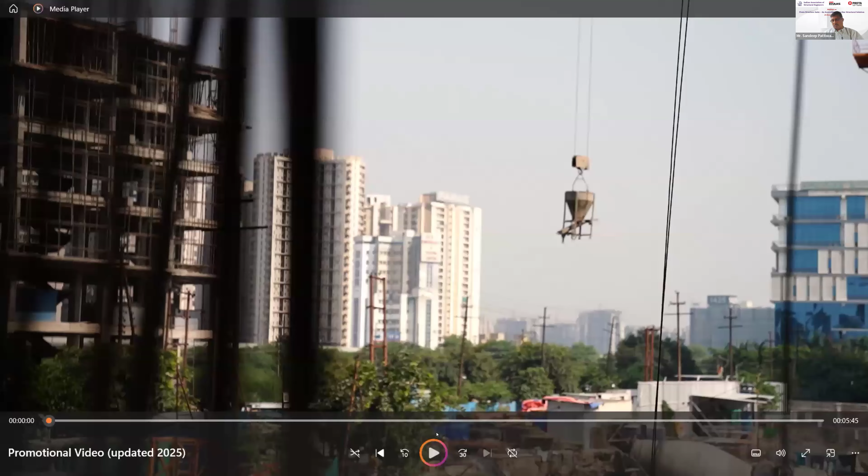The Indian Association of Structural Engineers, also known as IAStructE, was conceptualized and constituted in the year 2002 by a group of senior professional structural engineers from all over the country. IAStructE is registered under the Societies Registration Act 21 of 1860.

IAStructE is a national apex body of structural engineers in India with a mission to promote the structural engineering profession and cater to the professional needs of the structural engineering fraternity. In the short span of two decades, the association has attained an eminent position in the professional field, and its membership is valued very highly in the profession.

Since inception, IAStructE has been led by eminent structural engineers like late Shri Mahendra Raj, late Shri Kumar Ghosh, late Shri Subhash Chand Mehrotra, Professor Mahesh Tandon, Shri Manoj Mittal, Professor R. Pradeep Kumar, and Shri Alok Bhowmick as its president.

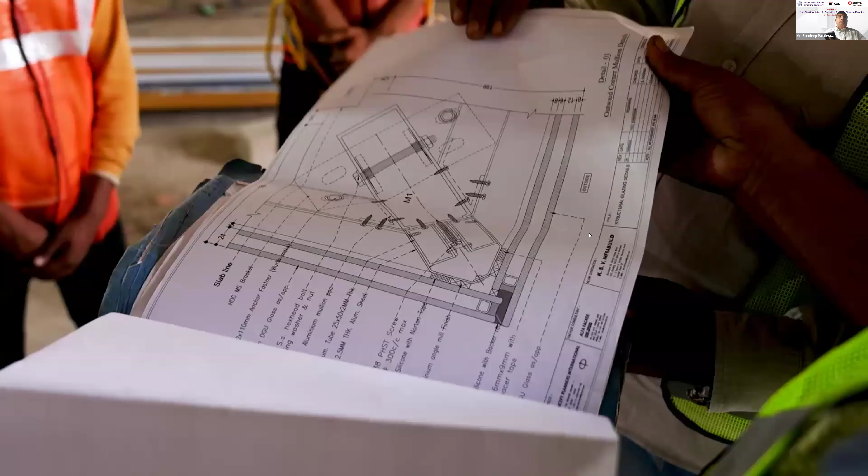IAStructE is a permanent member of the Engineering Council of India and interacts with the government on professional and policy matters related to civil and structural engineers. To expand its reach, IAStructE has collaborations with various international professional like-minded associations and institutions like IStructE UK and FIB, for strengthening global connections and professional exchange.

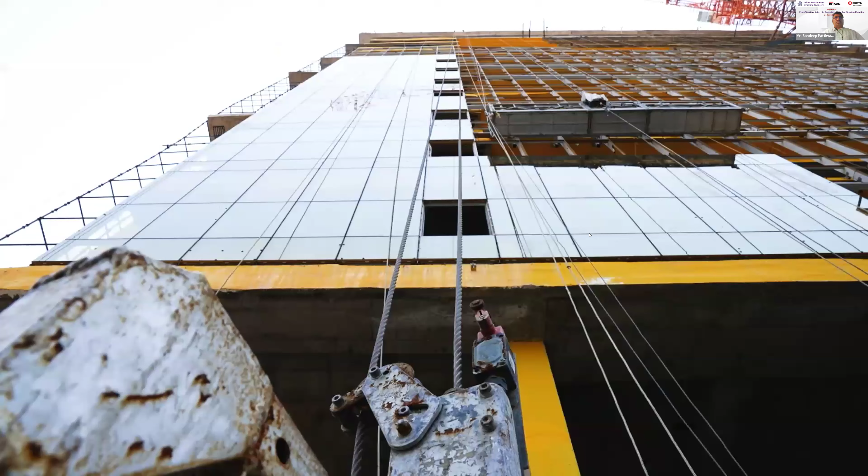IAStructE's prime objective is supporting and protecting the profession of structural engineering by upholding professional standards and acting as a mouthpiece for structural engineers in India. IAStructE endeavors to ensure that its members develop the necessary skills in structural engineering and work to the highest standards by maintaining a commitment to professional ethics and standards.

IAStructE is actively engaged in organizing several continuing professional development (CPD) courses for structural engineers to help them update their knowledge and advance their career paths. It also conducts refresher courses for young and practicing engineers, student-oriented programs, seminars, workshops, conferences, technical lectures, and discussions related to the latest technological advancements. Case studies are also organized regularly for members to enable them to continuously update their knowledge and skill set by interacting with the best minds from the industry.

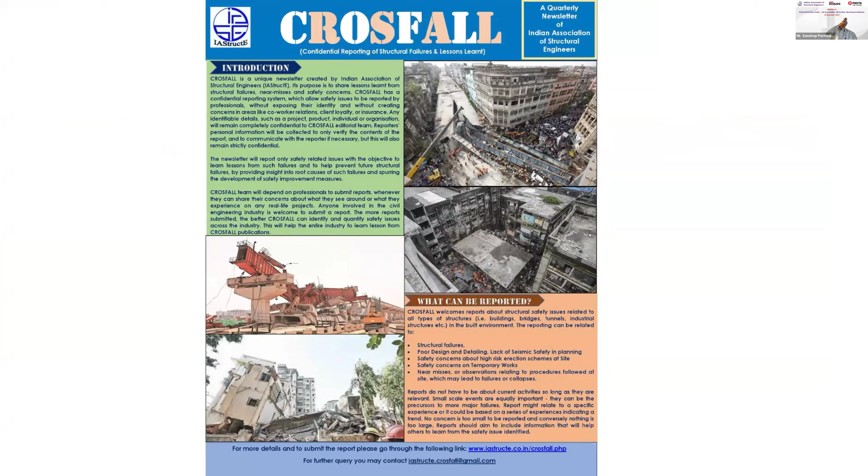IAStructE's activities are widely appreciated and known for quality technical content. IAStructE is also actively engaged in publishing its quarterly journal Structural Engineering Digest (SED), code commentaries, professional guidelines, a monthly newsletter, and CROSFALL, a unique quarterly newsletter that confidentially reports structural failures and the lessons learned from them. IAStructE's publications are becoming popular with time.

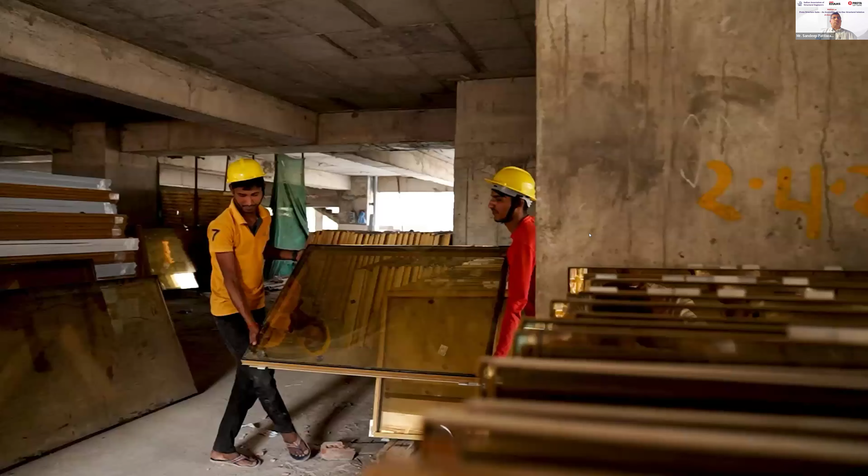IAStructE has representation in various technical committees of BIS and IRC as well. Its members are actively contributing to National Code Formulations.

In the year 2020, IAStructE started the National Awards competition to stimulate interest in the structural engineering field and to promote innovative thinking and creativity. The awards are presented to the winners in recognition of their outstanding contribution to structural engineering, in categories which include Outstanding Structure, Outstanding Structural Engineer, Outstanding Woman Structural Engineer, Promising Young Structural Engineer, and Best Master's Thesis in Structural Engineering.

Reaffirming its commitment to professional excellence, IAStructE launched the accreditation program in 2023. This flagship initiative empowers practicing engineers to evaluate their competencies, identify growth opportunities, and strengthen the foundation for sustained professional success.

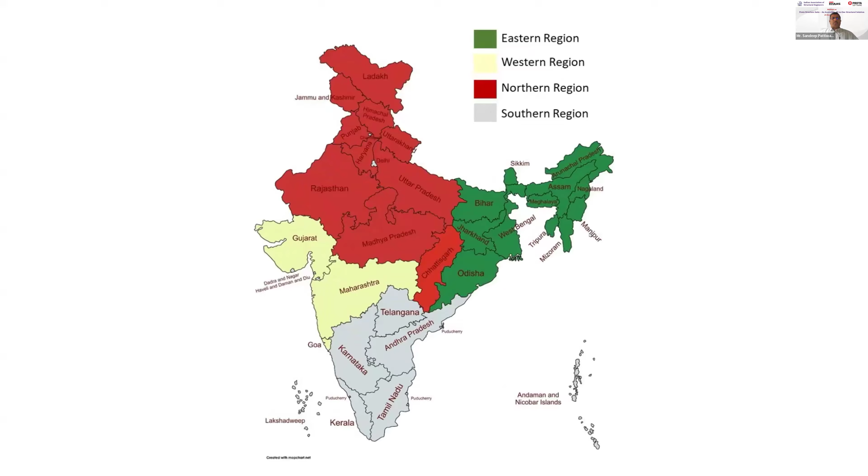IAStructE is currently operating from four regional centers, namely Eastern, Western, Northern, and Southern, having its headquarters in Delhi, to inculcate the professional culture and provide hand-holding to the budding engineers.

Joining IAStructE offers exclusive resources, mentorship, and networking with industry leaders. Members enjoy discounted registration for workshops, seminars, and events, along with discounted membership of FIB, opportunities for certification, career guidance, leadership roles, and enhanced professional recognition.

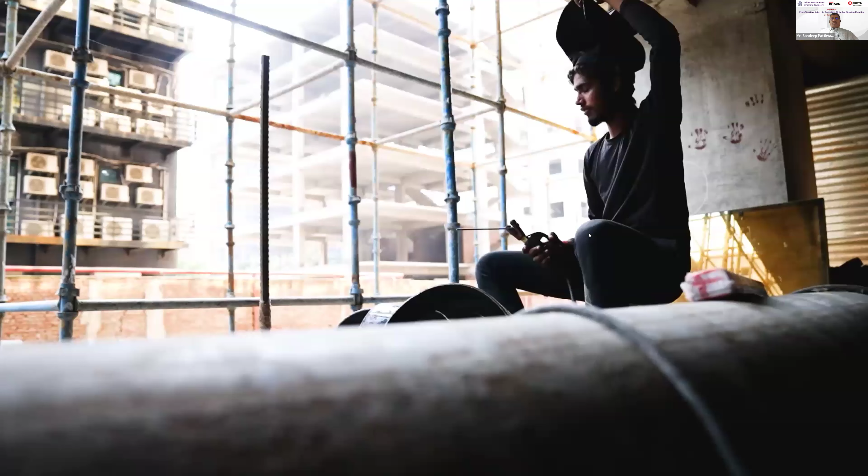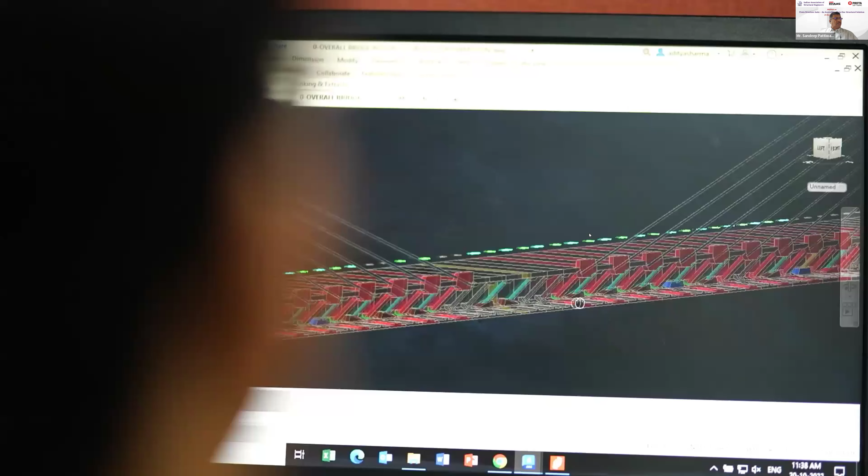IAStructE has its student chapters in several leading engineering institutions as well. Membership of IAStructE is open to all civil and structural engineers engaged in the structural engineering profession. Members are elected based on their qualifications and experience in different grades as per eligibility requirements prescribed in the bylaws. Each application is carefully scrutinized before electing the members.

More information about IAStructE is available on its website, www.iastructe.co.in.

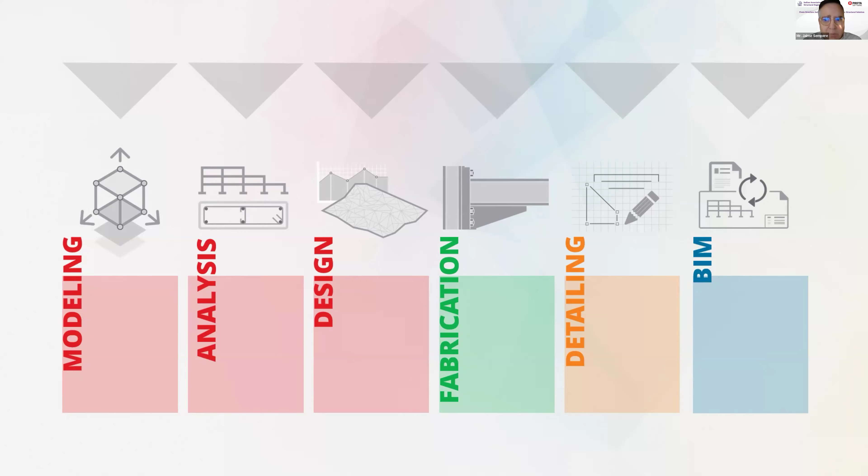You will notice that ProtaStructure Suite is composed of just one software that within it has 4 different softwares. We differentiate ourselves by integrating modeling, analysis, design, detailing, fabrication, and BIM process seamlessly, allowing you to integrate the whole process in a single solution. This allows our users to rapidly deliver projects by using a single software, hence the reason we refer to ProtaStructure as an all-in-one solution.

ProtaStructure Suite consists of 4 different modules, and we provide them in a single package if needed. We have ProtaStructure, which is the core system for modeling, analysis, and design of your structures. It is complemented with other tools like ProtaDetails, a complete CAD system for automated detailing and drawings, focusing on concrete detailing. It includes a unique design library of calculations for design of things such as retaining walls and piles. ProtaSteel complements steel design by automating all the steelwork connections design.

It provides comprehensive steel detailing and automatic connection design of our structures. Important note, we provide drawings and calculation reports within ProtaSteel as well. And finally, ProtaBIM allows you to connect with other tools and systems that you may be using, allowing you to collaborate better with team members. ProtaBIM allows the team to communicate with other BIM platforms and solutions like Allplan through IFC, or Archicad through SAF, and even share analytical data with SAP or ETABS.

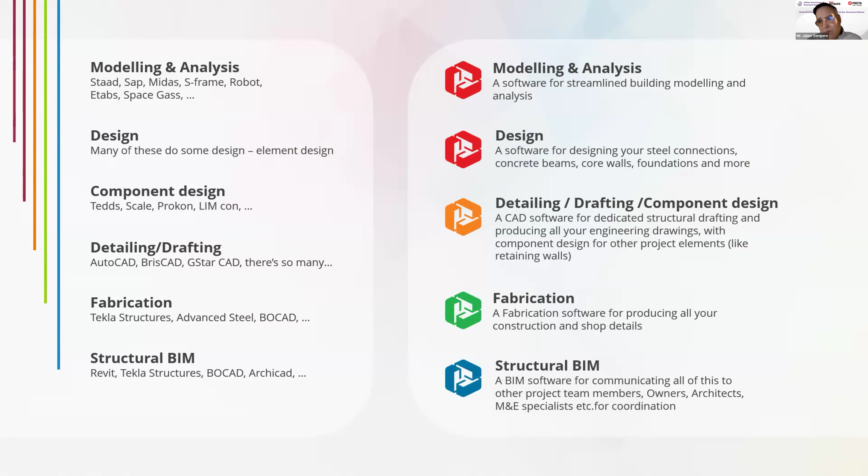So instead of having to go through many different solutions—one for modeling, another for design, another for components, detailing, fabrication, and so forth—we're able to bring all of these solutions under one umbrella within ProtaStructure Suite. That's why we refer to this as an all-in-one software.

ProtaStructure Suite is developed with BIM in mind. It was always developed with BIM in mind. So here's a slide where you can see better the entire BIM flow of our software solution. Remember that all these solutions are offered in a single economical suite called ProtaStructure Enterprise.

You can use Prota Details, the revolutionary structural drawing detailing software, to automatically create and organize all your RC drawings. Then you could take the model design of ProtaStructure directly into ProtaSteel and save hours with automated design of a comprehensive range of bolted and welded connections of your choice.

You can directly link your model to BIM platforms and software solutions like Autodesk, Revit, Allplan, and many others, focused on formats including IFC, 2D, 3D, DXF, and SAF. You can transfer and compare your analytical model with other general purpose analysis software such as ETABS or SAP 2000. And you can also create and share highly visual calculation reports featuring Microsoft Office or PDF export as well.

Product excellence is necessary in our sector, and it is also the key to our success. ProtaStructure is being used by thousands of large enterprises all around the world. You may have heard of some of them, worth mentioning, like AECOM, Sunway, Arup, WSP, Jacobs, L&T Construction as well. These organizations have been using the product to deliver their engineering projects for many years.

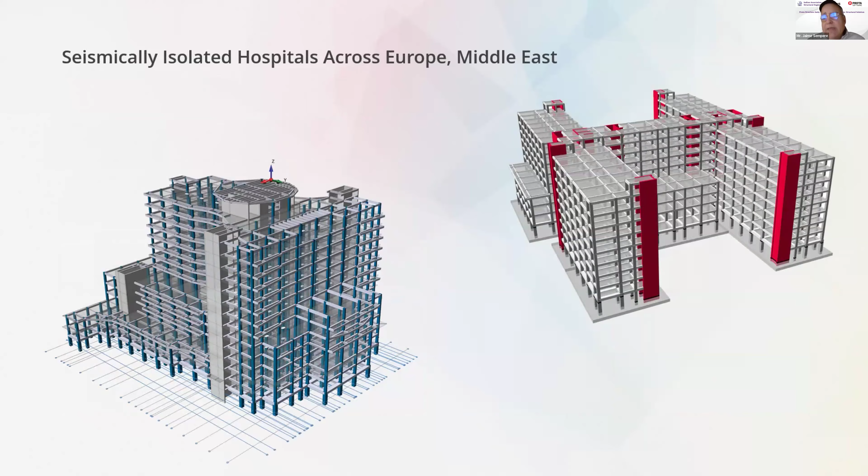Let's also keep in mind that several hospitals were also designed with ProtaSuite. One worthy note is that these hospitals are also seismically isolated buildings. With ProtaStructure Suite's unique capabilities, you can insert seismic isolators into your buildings too.

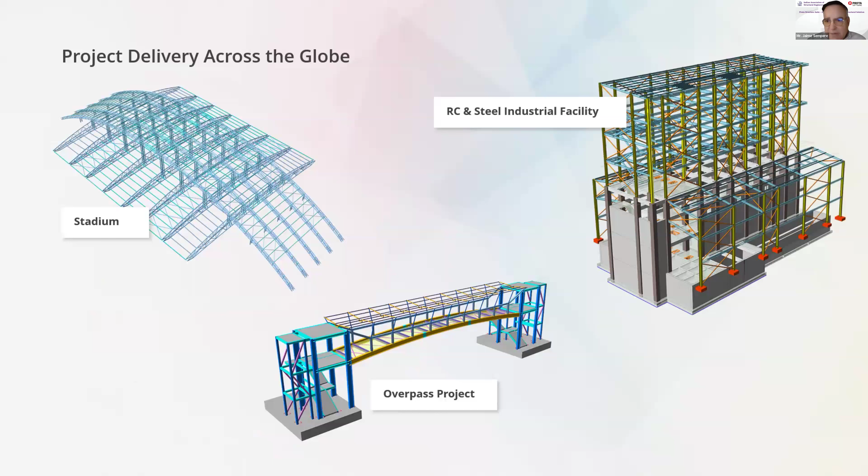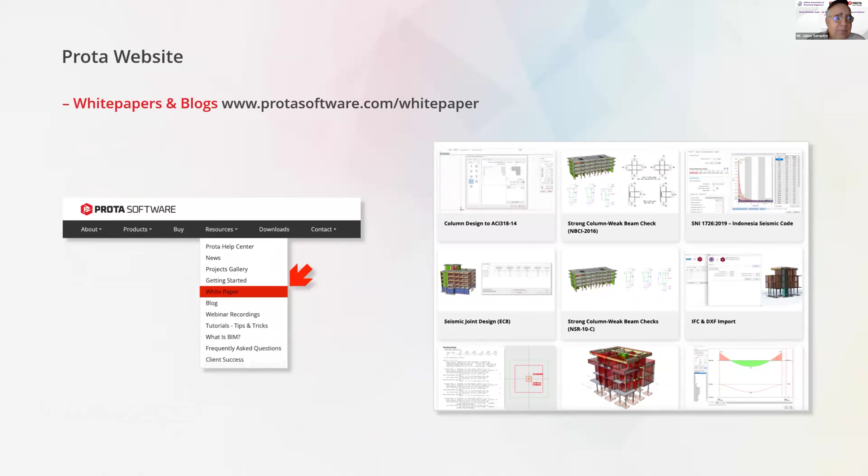In addition, we also pride ourselves in having an excellent help center and excellent technical support. It's not just about offering software, but it's also about having all of that support, data, and information ready to handle the customer and assist them in all their doubts, whether it's through our website, through blogs that we have prepared, or also our YouTube channel, okay?

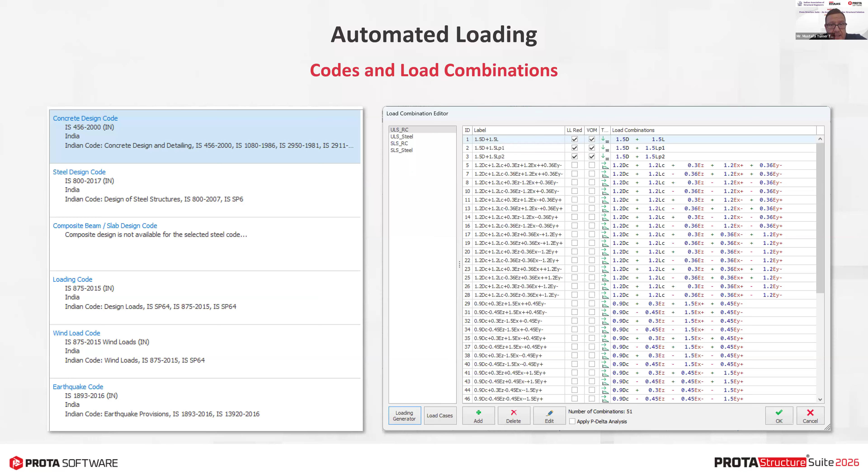In ProtaStructure, load combinations are generated automatically using an interactive wizard. You can choose options for vertical and lateral load cases, such as pattern loading, construction stage, P-delta effects, response spectrum analysis or equivalent static analysis, or even vertical earthquake analysis. All the combinations and load cases will be automatically created by ProtaStructure by honoring the selected design and seismic codes. We also create the ultimate limit state and serviceability limit state combinations for reinforced concrete and steel as well.

One item to note here is the 2025 version of IS 1893. We know that it has been published in India and you have a transition period of 3 months. So this is also a work in progress and we are hoping to release it to you soon.

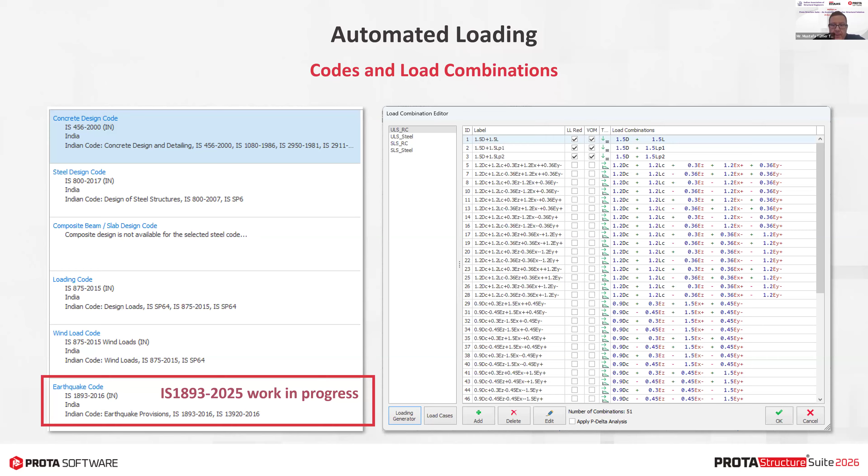Wind loads are calculated in ProtaStructure according to IS 875, the Indian wind loading code. When you launch the wind load generator and specify the necessary parameters, such as basic wind speed, minimum wind pressure, directionality factor, structure type, and terrain category, all the wind forces acting on the story levels will be automatically calculated. Besides, you can also import wind loads from an Excel spreadsheet.

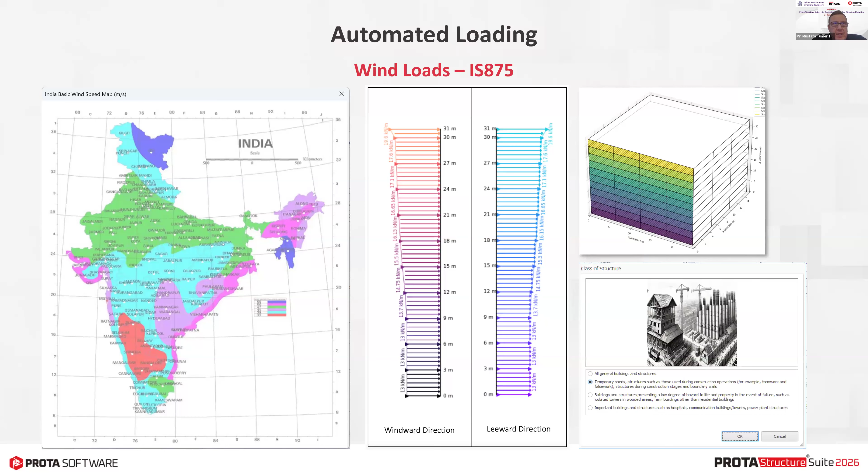So let's say you have a wind tunnel analysis and you get the results from that detailed wind tunnel analysis. If you have those results in an Excel format, you can import it into ProtaStructure and apply it to the story levels as well. But wind loads is an important topic in Indian standards, and we had a lot of requests about it, especially about the dynamic wind loads.

That's part 3 in IS 875. We have implemented that as part of the release in ProtaStructure 2026. We are now supporting the empirical natural period calculation. We can calculate the dynamic response factor now, including also the vortex shedding frequency and the resonance risk check. These are all part of the wind load report in ProtaStructure. However, aeroelastic instabilities such as flutter or galloping effect or component-specific oscillations are not in this scope.

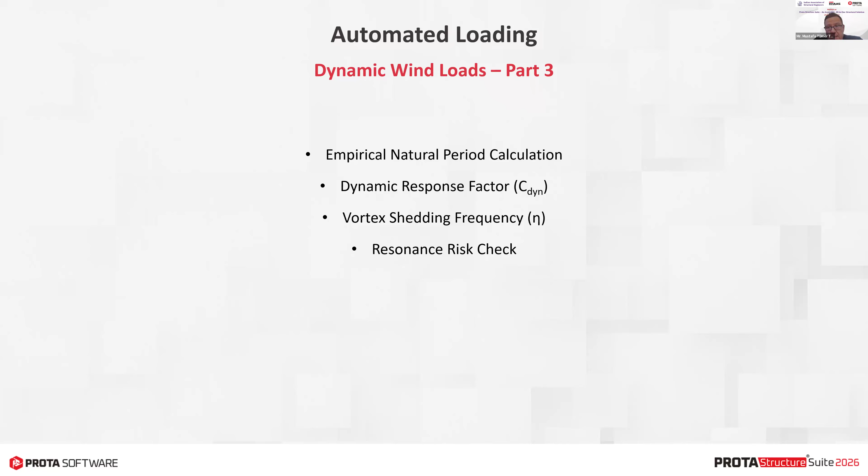We must emphasize that. ProtaStructure has a very comprehensive user interface for calculating the acceleration spectra using the parameters outlined in IS 1893. You can select a town in India and the related seismic zone and seismic zone factors will be fetched automatically. We provide you with helper tables taken from the code with relevant references, so you are not lost in the code. You can select different structural systems in each orthogonal direction to make use of different behavior factors and, of course, different design spectra.

Also, IS 1893 requires a different ascending portion for the spectral curve. These are all detailed analysis settings.

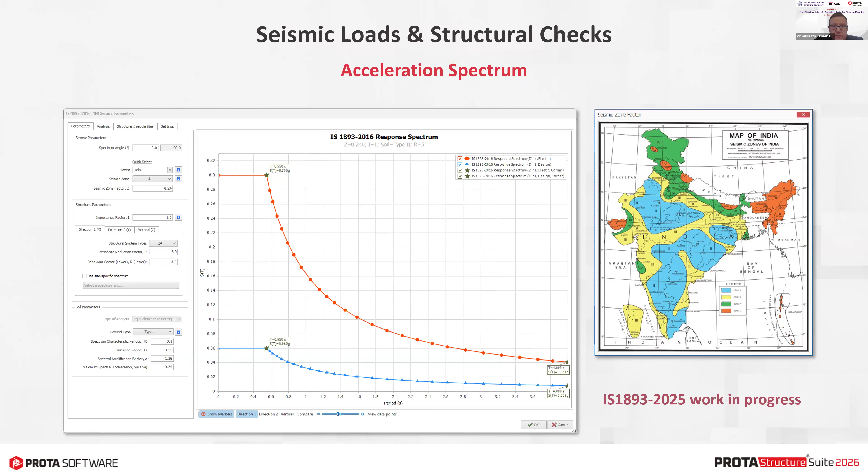But after that, seismic analysis is not complete unless you perform irregularity checks. All the analysis is done according to this elastic and design spectrum calculated in the previous step, but the post-analysis report, for example, includes all the important checks related to IS 1893 with code references. For example, a drift-based soft story check is done, vertical mass distribution is checked, torsional irregularity is checked, and analysis is automatically repeated with additional eccentricities if a certain penalty is required. Also, applicability of the equivalent static method is checked.

If you have a building with a basement, basement validation is done, comparing the upper structure period to the whole structure. Inter-story drifts are checked, and the prominence of second-order effects is checked. If you have a basement, a two-stage analysis is performed for these kinds of buildings, which allows you to use different mass sources for the basement and the upper superstructure. Additionally, response spectrum analysis and equivalent static comparison is done, and cumulative modal mass participation is checked and reported in this report.

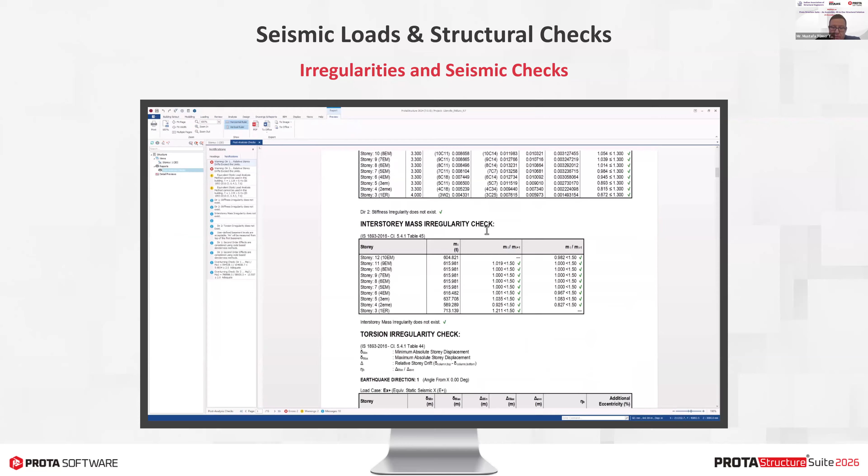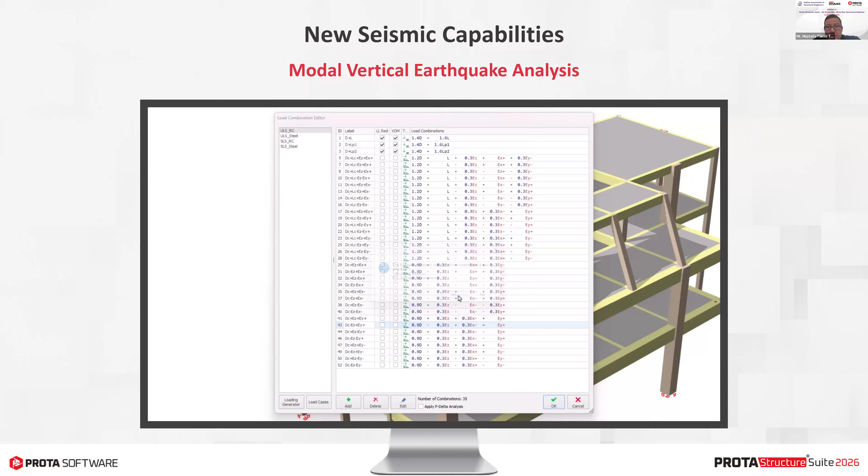For buildings with transfer columns, large slab openings or beam spans, large cantilevers or slanting columns, the approximate static vertical earthquake calculation may not be sufficient. Besides, the seismic codes require the use of modal vertical earthquake calculations in these kind of extreme scenarios. For example, Eurocode only allows the use of modal vertical earthquake analysis.

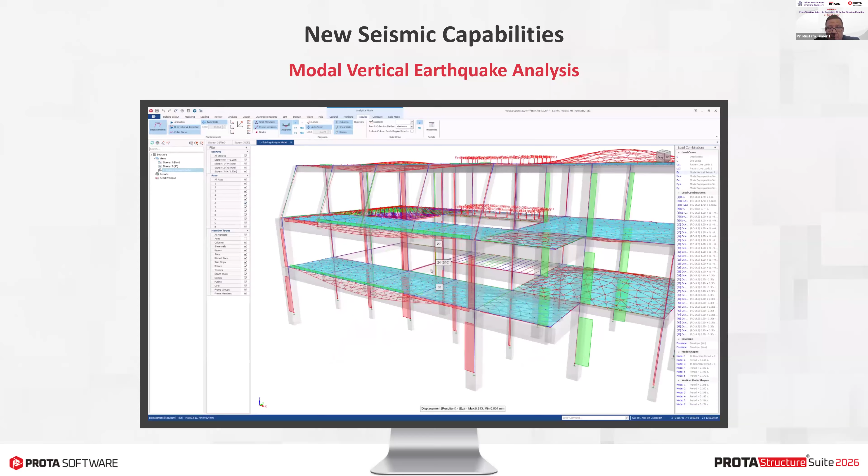For this purpose, we first introduced the vertical acceleration spectrum in ProtaStructure, accessible in the seismic parameters window, and it's also reported in the pre-analysis report. Secondly, we automatically calculate the vertical mass distribution, or vertical mass matrix. Slabs should be meshed to accurately consider the mass distribution. We then automatically calculate the vertical vibration modes, which is very different than the lateral vibration modes, and the number of modes can be customized by the user.

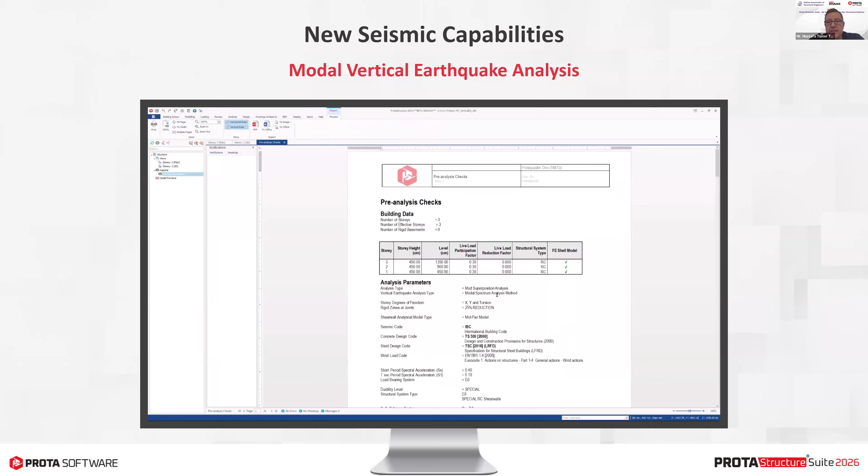The heart of this analysis is a mode superposition analysis in the vertical direction, not lateral. The results are obtained in absolute terms with dominant mode sign.

After the lateral and vertical earthquake analysis, ProtaStructure continues with member design. For beams, we support ductile design and detailing. We automatically detect the confinement zones, perform capacity shear design and plastic design for the members, and of course the entire bending design is done under an envelope including the seismic forces.

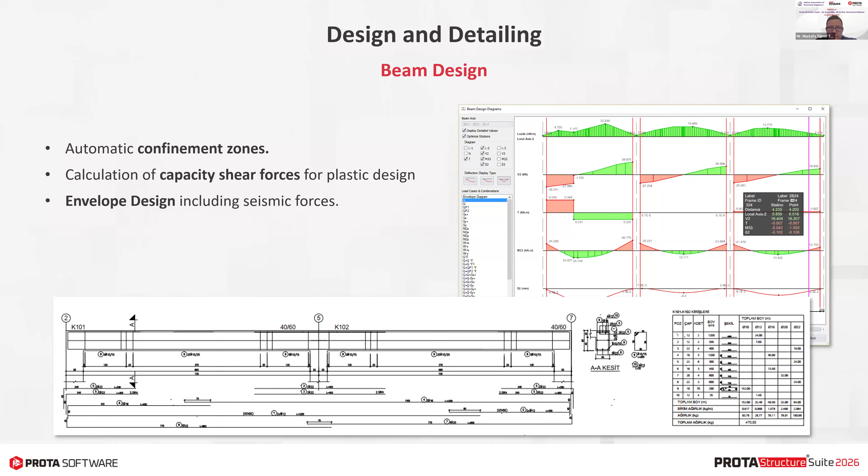Complementing the reinforced concrete beam design is a detailed step-by-step beam design report. Providing transparent design documentation is our number one priority, and we've invested a lot of time to fulfill this. The RC design reports in ProtaStructure now include more details, step-by-step calculations, formulations, and code references.

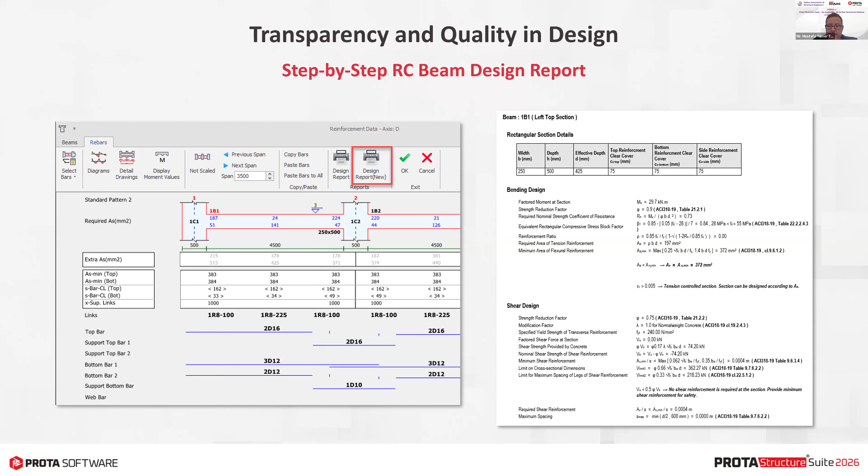When it comes to columns and shear walls, ProtaStructure is also capable of doing ductile design and non-ductile design for non-seismic areas. We support true biaxial bending for columns, and we do capacity design for seismic scenarios. The column section is automatically confined with single link, double link, diamond links, or tie bars - all available in the software.

We automatically detect the minimum reinforcement ratios and constructive rules. Confinement zone lengths are automatically determined, and links are designed in span and support regions. Links inside the column sections are automatically laid out, considering the confinement requirements.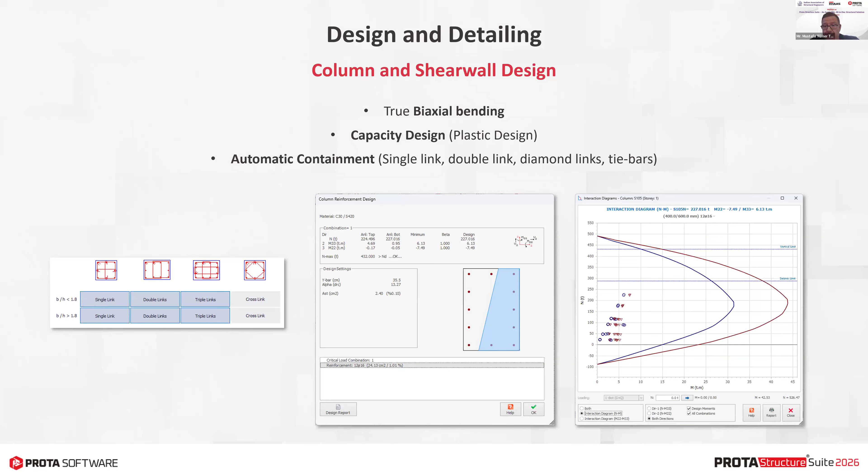When it comes to walls, a crucial part of the shear wall design is the boundary elements or end zones - a very challenging task in shear walls, and different codes suggest different methodologies and approaches. In ProtaStructure, you can automatically lay out end zones using a percentage of related wall length or by specifying a distance.

End zones of core walls with known shapes such as E, C, L, T, or H can be laid out automatically using the polyline column editor. For random shapes, full automation may not always be possible, but we've developed tools to make it as easy as possible to insert the end zone rebars. We have an interactive polyline wall editor where you can specify the end zones yourself and put the rebars in the web regions and end zone regions.

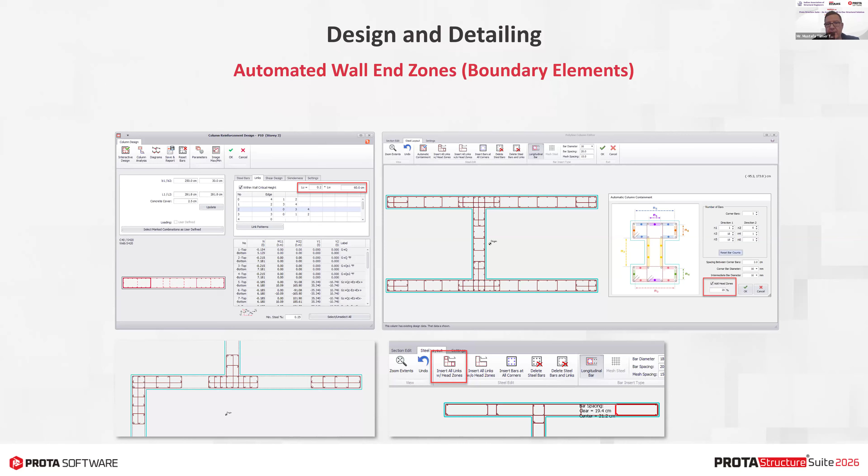For effective column detailing, ProtaStructure offers comprehensive options to cover a wide range of constructability and code scenarios. Among these are optional lap splices at the column mid-height - there's a setting that allows you to lap splice the longitudinal bars in the middle of the column or at story levels. Also, hook anchorage options are possible, and the links in the joints can be customized. We have very comprehensive options for column detailing.

We also support different shear wall horizontal web bar layout options for ductile detailing. When we observe the damage in earthquake regions after severe earthquakes, most of the damage in shear walls is either shear failures, shear cracks, or damages in the end zones.

Under extreme loads, the end zones of the shear walls are in compression, and the longitudinal bars end up breaking the concrete and popping out of the section in the end zones. To prevent this, we have a couple of options to anchor the horizontal web bars into the end zones, which you can see on the screen.

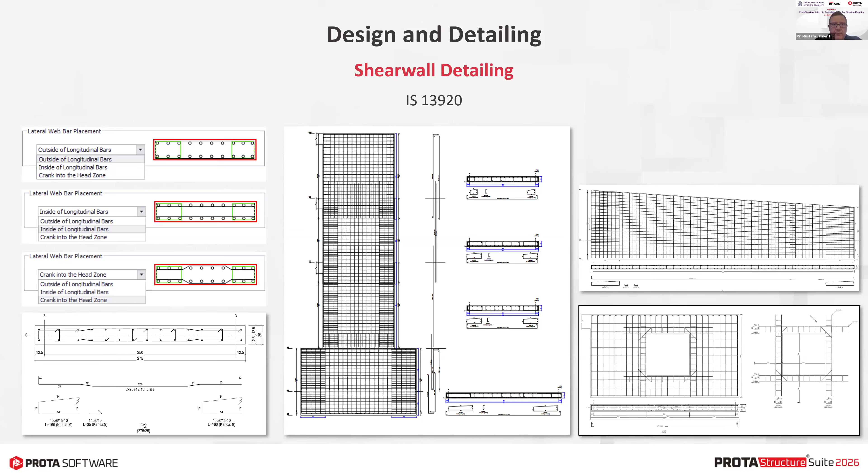Of course, we support all this design and detailing with a step-by-step reinforced concrete design report. One of the most important checks to ensure ductile behavior is the strong column and joint shear checks, done in accordance with IS 13920.

So what we do is, after you design the structure, you must put the reinforcements in the columns and beams. After that, ProtaStructure checks the capacities of the beams and columns to make sure that the columns are stronger than the beams and the joints do not fail under shear, to prevent a brittle failure.

So these are all done with detailed reports in accordance with IS 13920. We have a visual interrogation tool that shows the failure status or success status with color codes. By the way, this is one of the most challenging parts of a design, especially if you are designing a frame structure without using any shear walls.

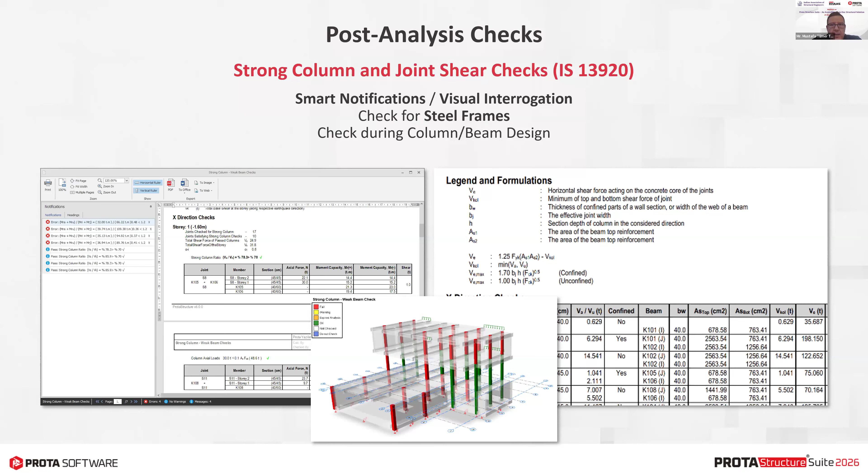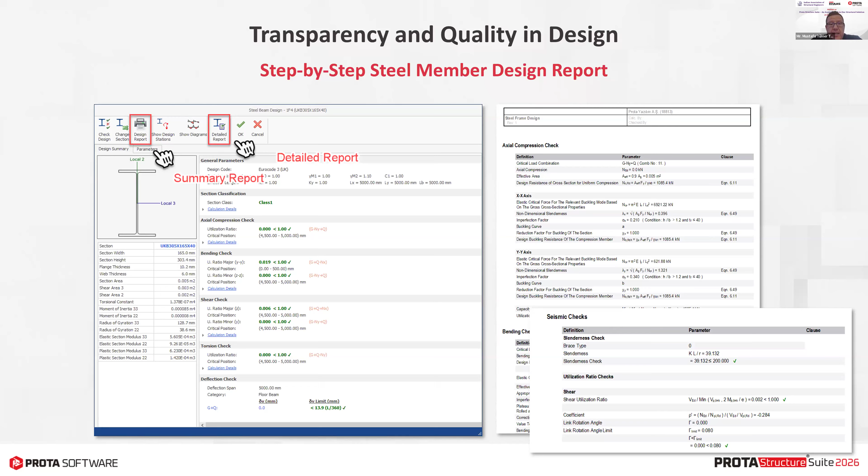This may be one of the toughest checks to fulfill. Lastly, we do have a steel design functionality. Of course, we support IS 800 for steel design, and we have detailed step-by-step reports for the steel design as well.

An important aspect of ProtaStructure is the performance-based design, assessment, and retrofit. So why is it important for engineers in India? Because we have received requests about IS 16700, which is for high-rise structures.

Actually, we have a similar concept in Turkey as well, where the Turkish seismic code has a dedicated chapter for high-rise structures in highly seismic areas. So the capacity design principles are not usually applicable or sufficient for high rises, because you have to verify or check additional performance criteria under different earthquake levels.

For example, for an earthquake with a return period of 475 years, it's our design earthquake. The capacity design principles may be applicable for a regular structure, and when we apply those principles, usually we say that this design is successful.

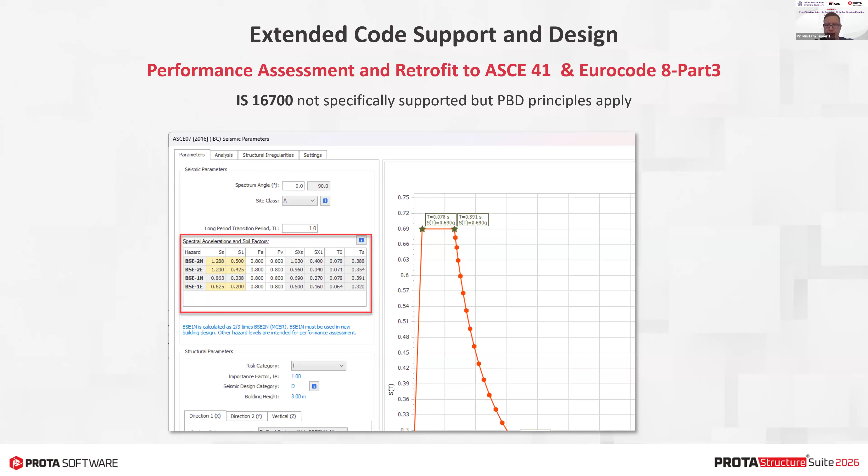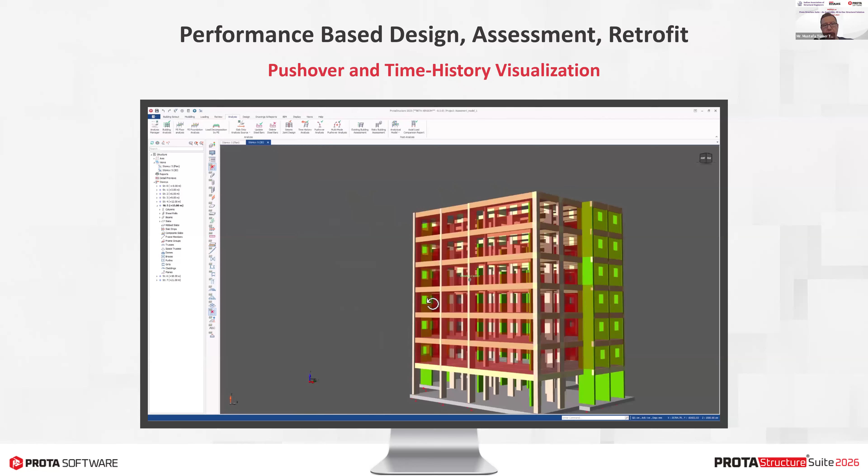So let's get a feeling of what a pushover or time history analysis looks like. After you perform the pushover analysis, you can visualize the result in ProtaStructure, the plastic hinge mechanism, step by step. And of course, we perform the pushover and time history analysis using our OpenSees integration.

We prepare all the data for OpenSees automatically. You don't have to do anything. We run OpenSees automatically under the hood, collect the results, post-process them, and visualize it for you, turning it into a member-by-member assessment report.

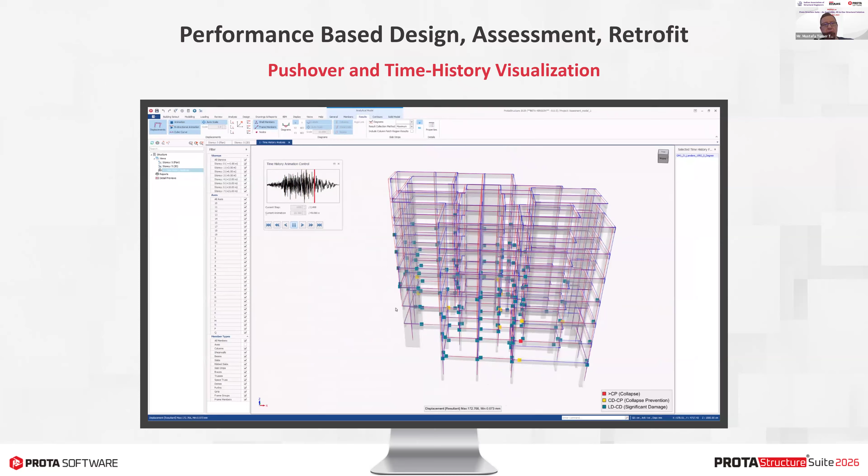So this is the time history results for a typical structure. You see again the plastic hinge mechanism and the ground shaking. And of course, you can overlay the plastic hinge performance limits so that you can colorize the damaged regions.

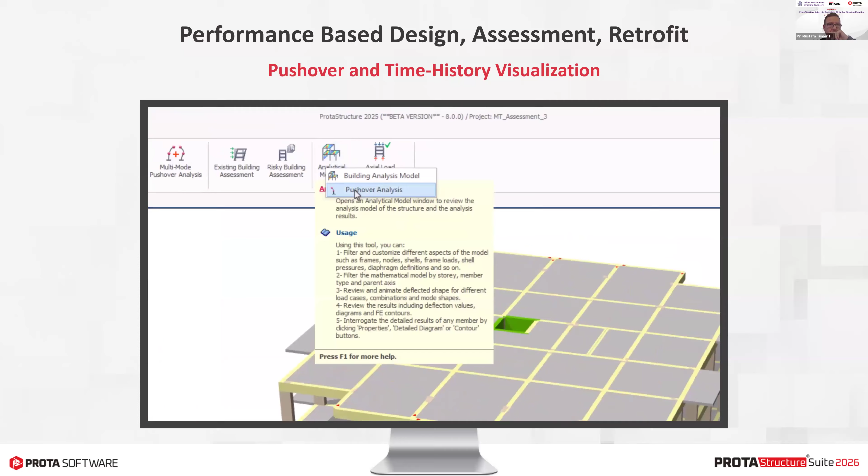The multi-mode pushover analysis is also a very important addition in ProtaStructure, because single mode pushover analysis is restricted to relatively regular buildings with small torsional irregularity and higher modal mass participation, and is usually applicable for low to mid-rise structures. But for buildings suffering from higher mode effects or irregularities, the single mode approach will not be sufficient.

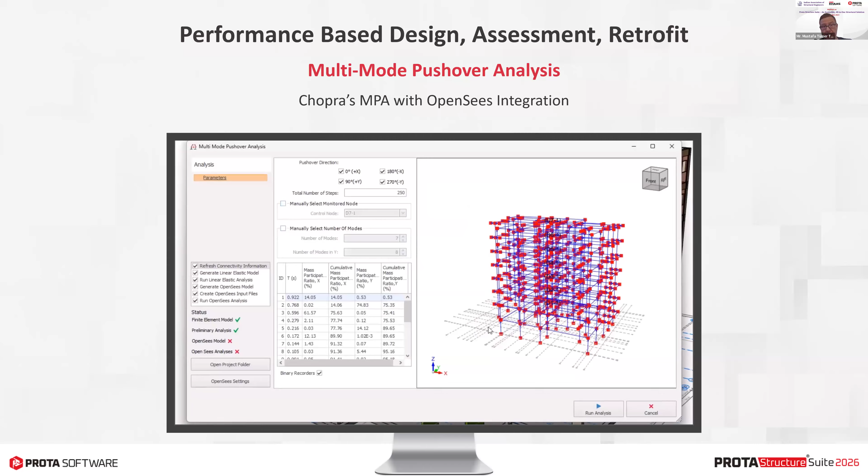In these cases, nonlinear time history analysis is used. But this is computationally very demanding, considering the number of accelerograms used, acceleration time steps, material nonlinearity, and convergence conditions. Knowing these facts, a middle ground between single mode pushover and full nonlinear time history analysis is the multi-mode pushover.

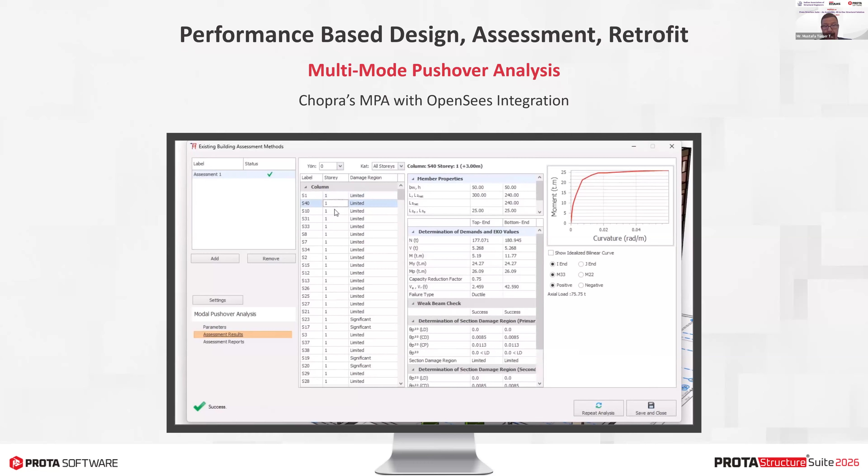In ProtaStructure 2026, we have adopted the Chopra modal pushover methodology. In simple terms, what we do is perform pushover analysis for each mode and combine their results. That's the theory behind Chopra's multi-mode pushover. After the results are obtained, a detailed assessment report is also generated.

Okay, and a very important feature in ProtaStructure is the nonlinear seismic isolators. Designing buildings with seismic isolators is really a different expertise, a very special field of earthquake engineering. And we have redesigned the workflow for the seismic isolators in ProtaStructure.

First of all, you can now define the isolators with the help of a library, and you will be able to specify the nonlinear parameters for the isolators. What's beautiful about it is that this way, you will now be able to perform a time history analysis which considers the nonlinear parameters of the isolators.

As you know, seismic isolators are also nonlinear, and they have specific damping characteristics, usually starting from 25% damping. So in seismic isolation, we concentrate the damping and the displacement at the isolator level.

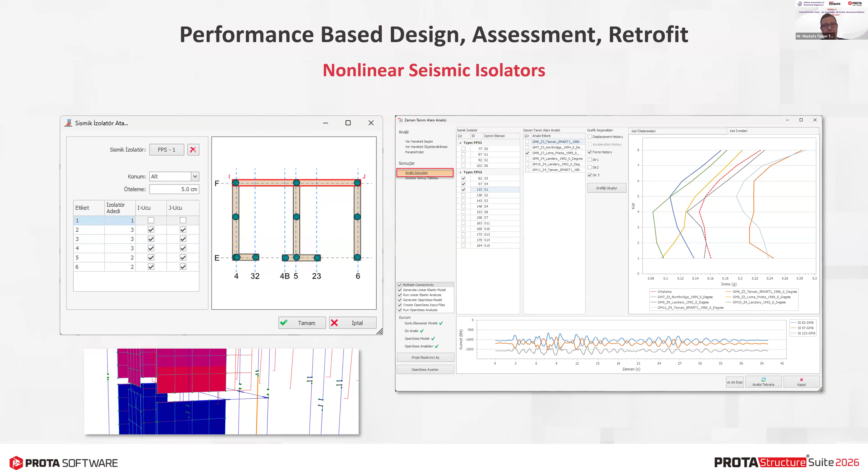An important part of the isolation design is the nonlinear time history analysis, where after the final design, after you select the isolator units and decide on them, you will do a nonlinear time history to double check the displacement and acceleration response history, to check the design requirements under DBE and MCE earthquakes. This nonlinear time history analysis is a special analysis where all the nonlinearity is concentrated on the isolators, and the rest of the model is linear elastic. So that's what we want to achieve.

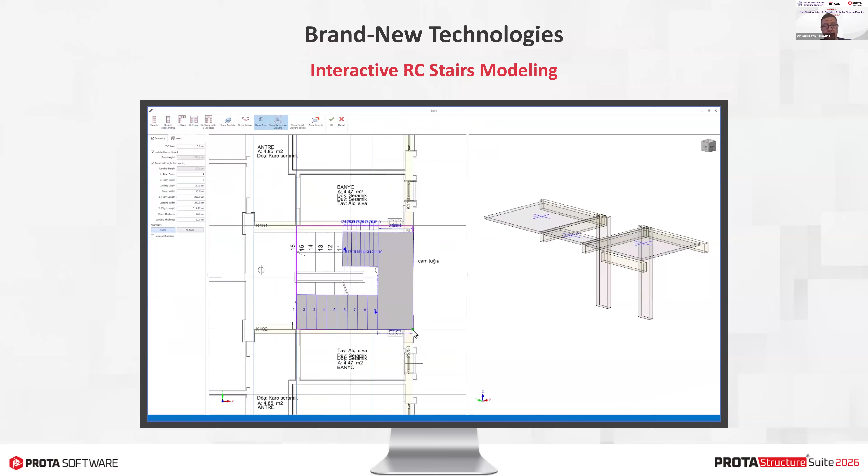Let's briefly talk about the highlights in ProtaStructure 2026. This is our new RC stairs module, and what's really cool is it lets you interactively model the reinforced concrete stairs, with smooth integration directly into the building model. We have even included a whole library of frequently used stair types to make things easy for you.

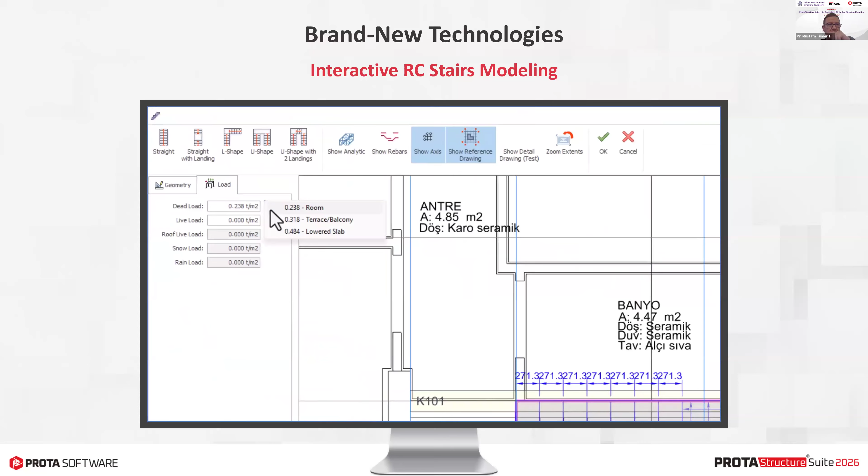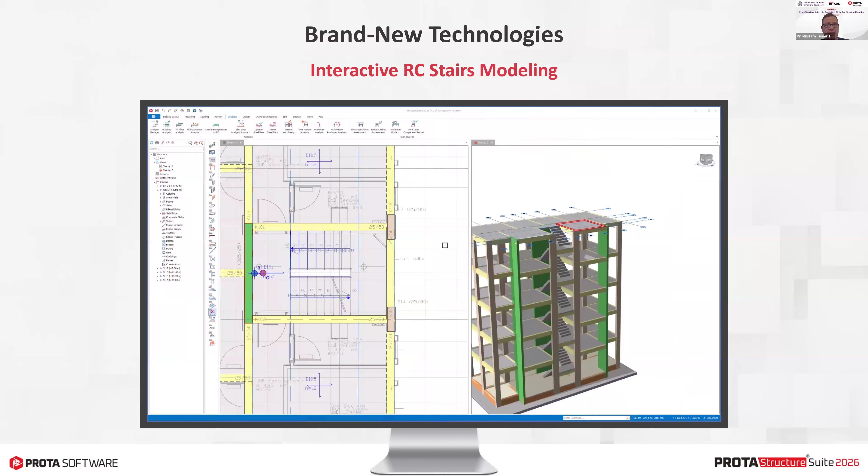When it comes to loads, you can simply apply uniform area loads on the stairs, in any load case you need. The new stairs module also supports 3D reinforcement. You can visualize them, and all the detailed drawings are based on the 3D reinforcement. The magic part is all the stairs are automatically integrated in the analysis model. They come with a compatible mesh, and all the right boundary conditions are already set up, so it's pretty much ready to go.

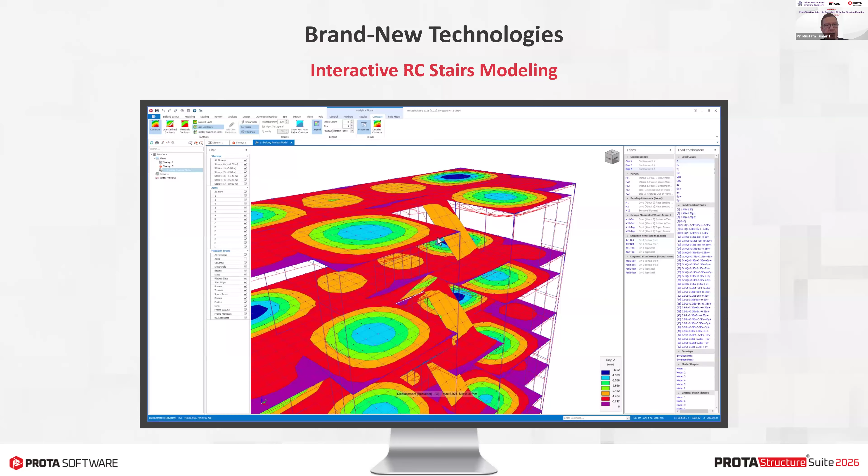Next up, we have been hard at work developing a comprehensive parametric macro specifically for inserting base plates under steel columns. The best part is you can actually visualize them instantly in plan and 3D views.

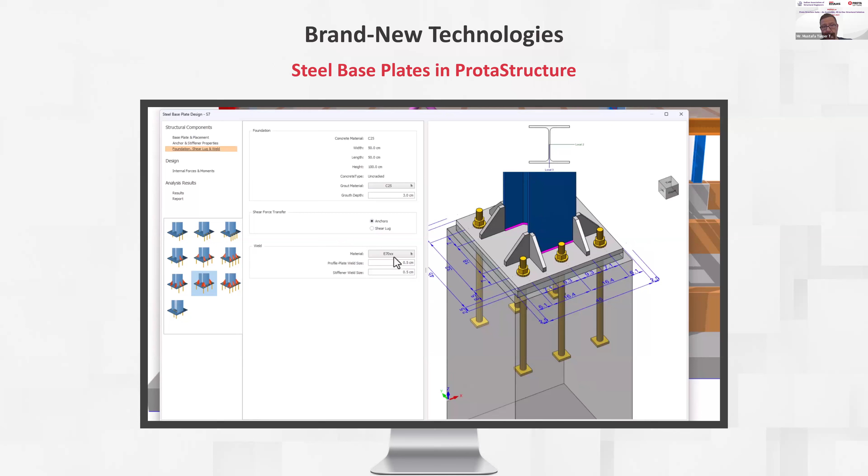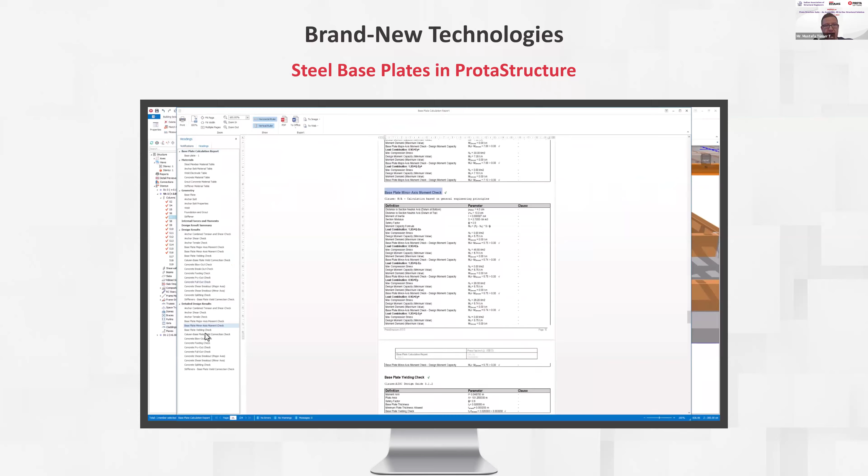We already have some great base plate features in ProtaSteel, but there is no design for base plates there. With ProtaStructure 2026, we are taking it to the next level, and we are now able to design the base plates in ProtaStructure. It includes weld checks, concrete anchor checks, etc. All the design checks are done in ProtaStructure, and it fully supports ACI 318, AISC 360, Eurocodes, and other international codes as well.

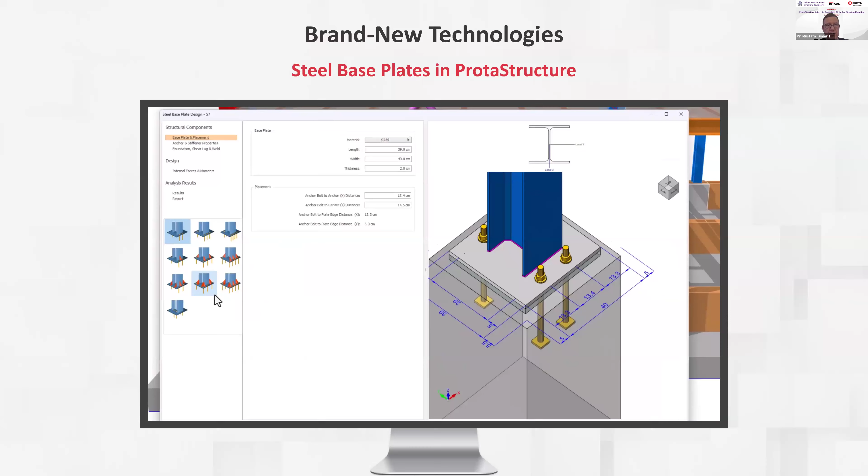Moving on, we have introduced a new feature in ProtaStructure 2026 called sub-basement walls and slabs. Sub-basement walls are typically part of the foundation, and they do double duty, supporting the infill on the ground story while also containing the fill within the foundation itself. In the past, sub-basement walls were tricky in ProtaStructure, and modeling was not straightforward. But with the new version, we now have a dedicated sub-basement wall type that you can directly model as part of the foundation.

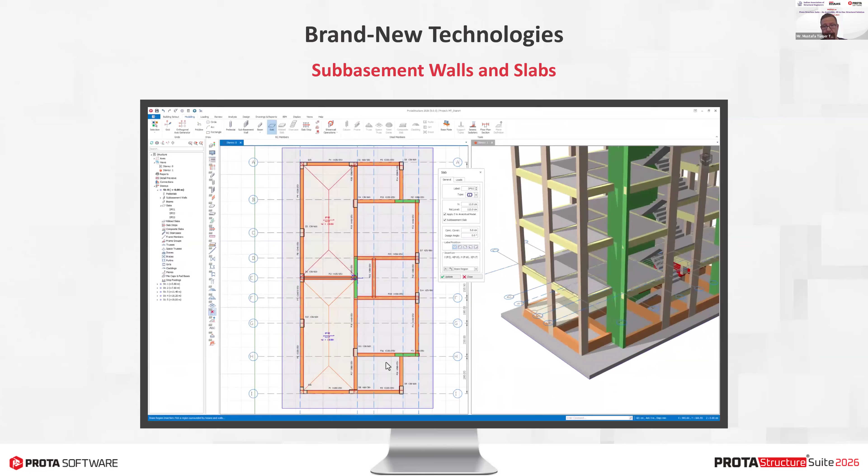You can include them in the analysis, and it will give you more accurate and comprehensive results. In addition, you can put the sub-basement slabs on top of these walls as well.

A major new capability in ProtaStructure is the design of doubly symmetric cruciform columns. This is not about adding a new shape, but about giving you compliance for the design of these columns to Indian codes as well, including other American and Euro codes. It will give you substantial benefits to make use of these cruciform columns in ProtaStructure.

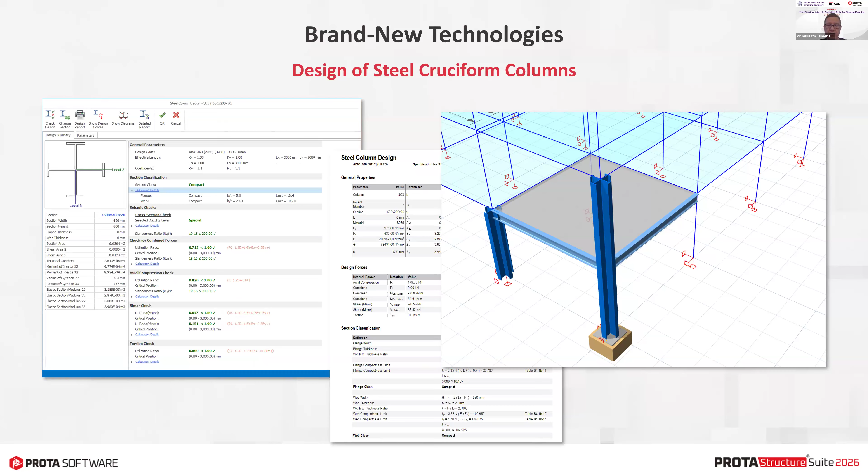Let's shift our focus to another fantastic enhancement in the new version: a powerful feature that really simplifies the design and analysis of concrete pedestals under steel columns. You can now seamlessly insert these pedestals and define their dimensions effortlessly, integrating them into your structural models. The smart part is when you insert a base plate under the steel column, it will automatically recognize these RC pedestals and perform all the checks.

When you use the finite element analysis, these pedestals are automatically included in the finite element analysis model, and you will get internal forces analysis results for the pedestals so that you can design their longitudinal reinforcement and links. It's a really great feature in ProtaStructure.

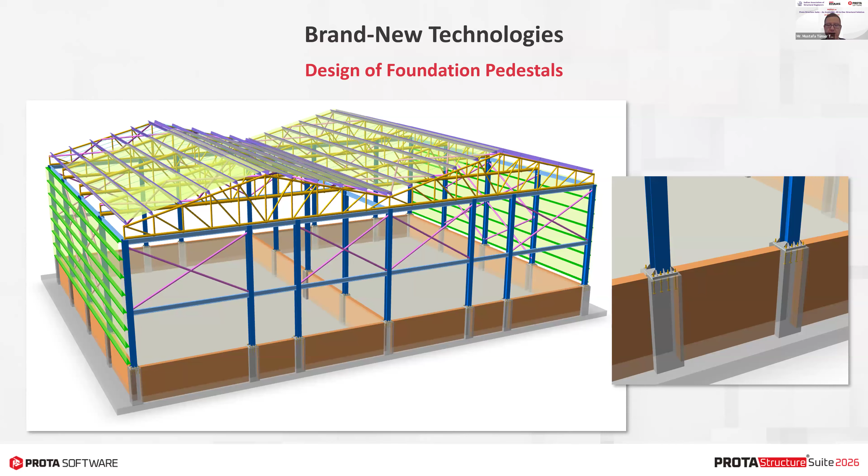Let's dive into another really powerful feature: multiple user-defined spectra in all directions. You are now able to define different spectrum curves in the X, Y, and Z directions. This will give you a great deal of flexibility and precision. The user experience and user interface have also been redesigned and streamlined so that you can make use of it effortlessly.

Another important feature is that when you define your custom user-defined spectrum curves, you can now compare this to the code spectra on the same graph. That's another feature.

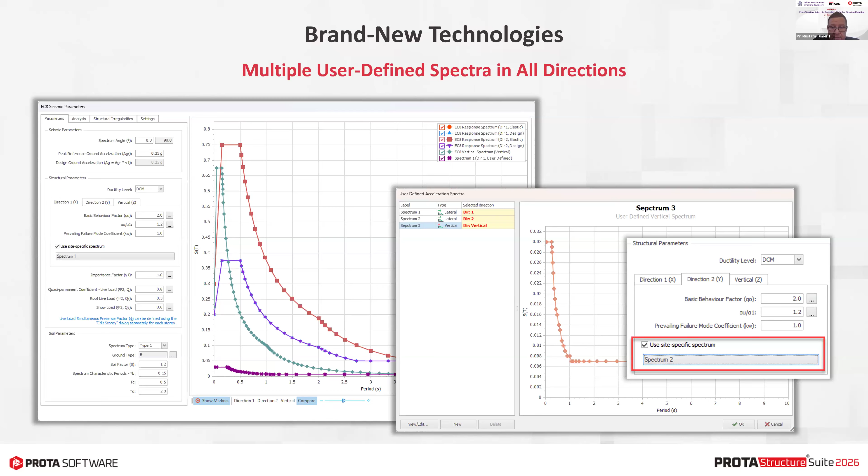Beyond the deflection check, we have introduced crack width checks that are compatible with IS 456. And not only Indian standards, but American standards and other international design codes are also supported with crack width checks.

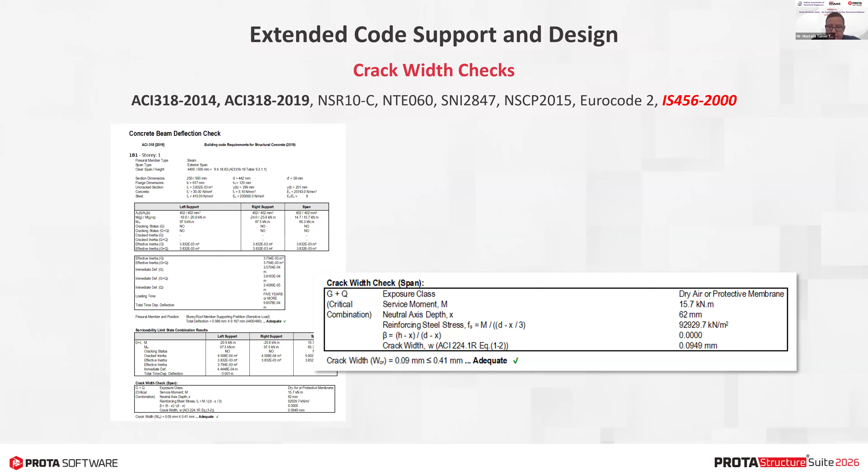A very specific check we've done for the IS code is the load transfer check from column to footing, clause number 34.4. It verifies the load transfer from the loaded column to the column area of the footing.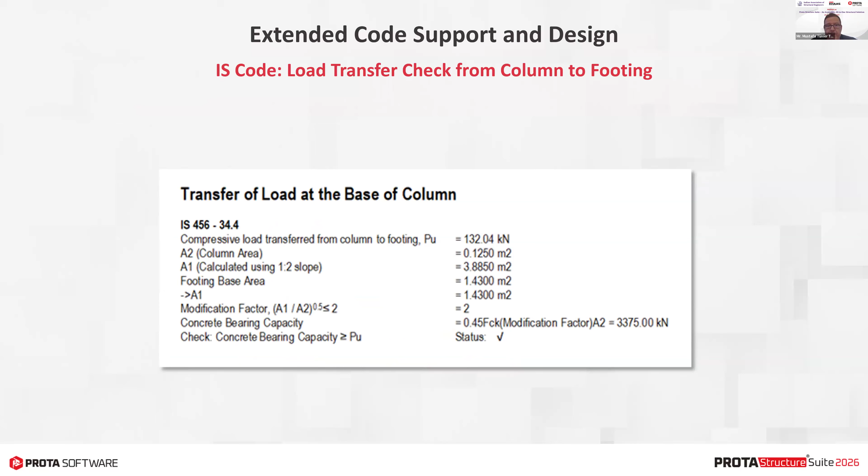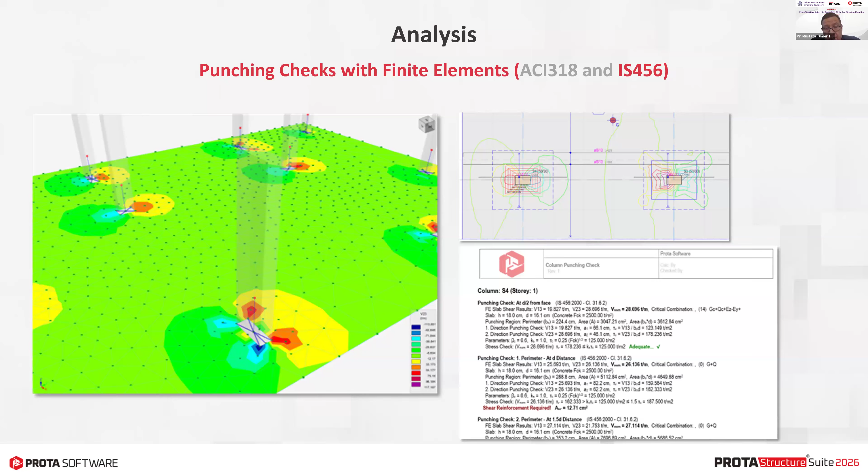About punching shear checks, that's also an important part of ProtaStructure. You can now perform the punching check directly using the finite element analysis results according to IS 456. We leverage V13 and V23, the out-of-plane shear forces in the slabs, calculate these out-of-plane shears along the punching perimeter, and find the maximum value. Then we check the concrete strength, whether this punching shear is resisted or not. We do this for Indian standards and American standards with a detailed report.

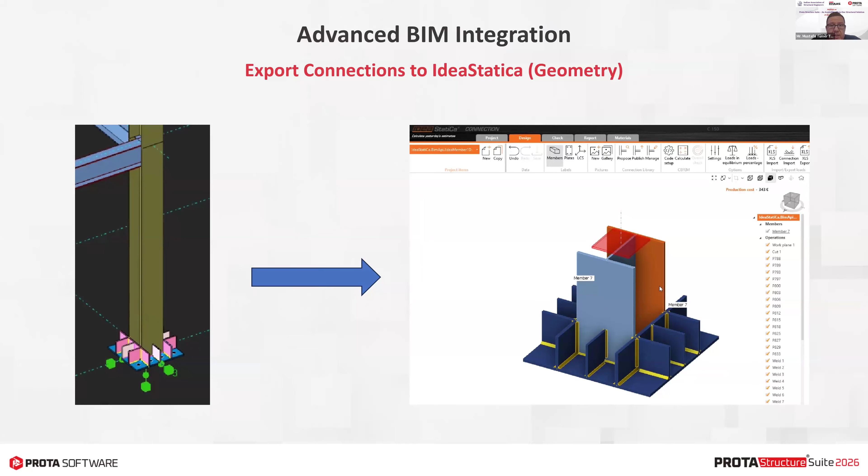Let's talk a little bit about BIM integration. We had introduced the IdeaStatica export feature in our previous versions and it received great feedback from our users, but in the previous version we were only able to transfer the geometry. With the new version, we enhanced it so you can export the internal forces.

Suppose you have 5 members connecting into a joint and 40 combinations, so you have 200 results, and you have to identify which member is connecting to the node from its J end or I end. It's a very tough job trying to do it by hand.

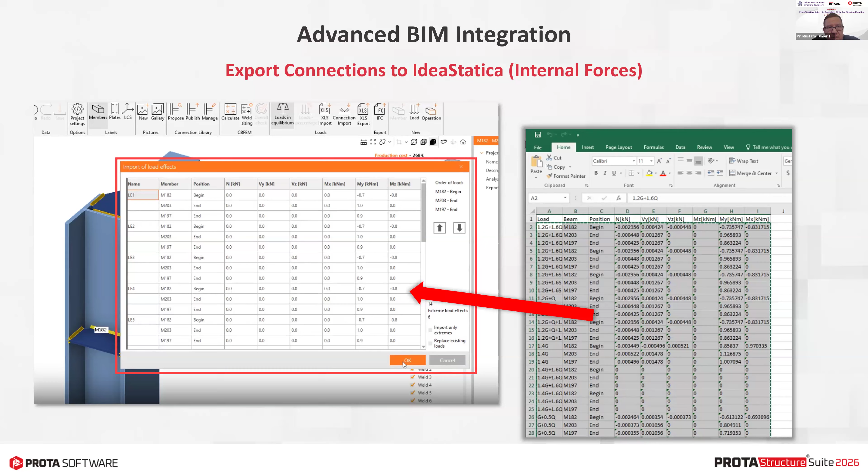But what we did, we automatically understand the connecting members, which end of the member is connected, I end or J end, and of course we know the combination results. We create an Excel automatically for this purpose, and all you have to do is copy the Excel table and paste it into IdeaStatica. All of a sudden you will have the internal forces, because we know the ID of the members, so the internal forces will be automatically matched to the correct members in IdeaStatica.

In ProtaStructure 2026, we now support IFC4, industry foundation classes. IFC4 plays a crucial role in the industry because it enhances data interoperability and standardization. It addresses many limitations of its predecessor, IFC 2x3, and IFC4 supports more complex geometries, such as B-spline surfaces and curves. So now ProtaStructure supports the latest version of IFC as well.

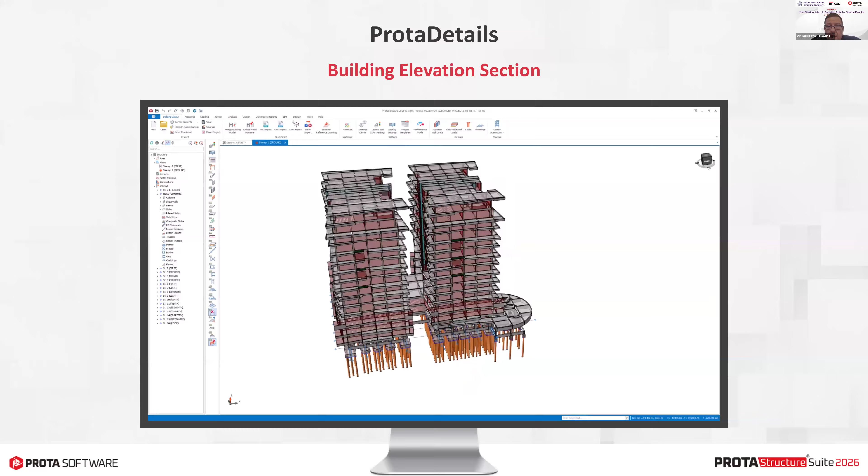One important feature in ProtaDetails is the section view from the building. It will help you better visualize your building model's section cuts. It works similar to the good old section command.

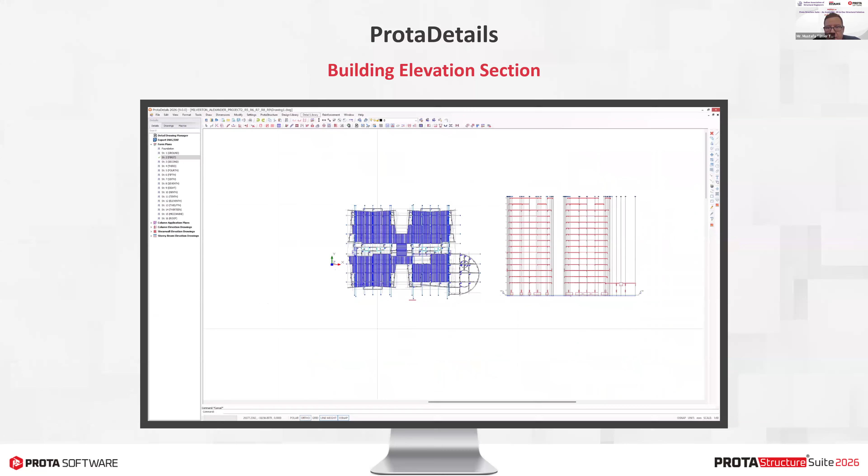You need to have a floor plan drawn on the arena, as you see on the screen. All you have to do is select the building section command, cut a section, and you will see the building section in its entirety on the screen. If you have stairs, they will be included in the section. If you have infill walls, all the infill walls will again be drawn on the section as well. It's customizable.

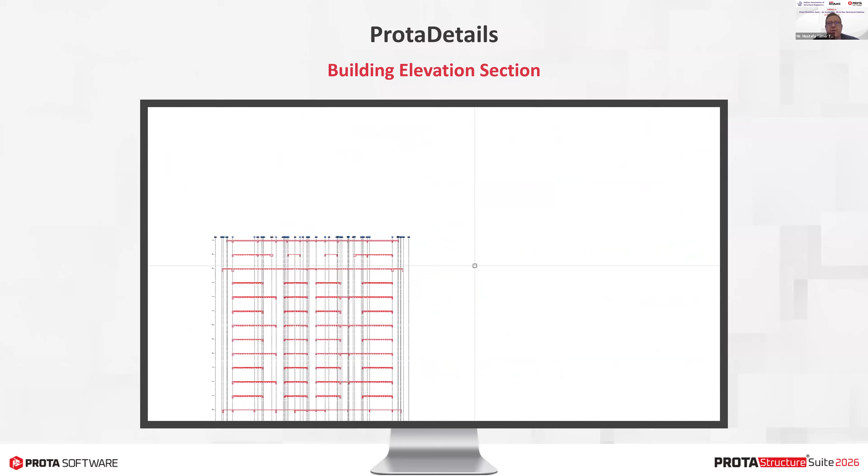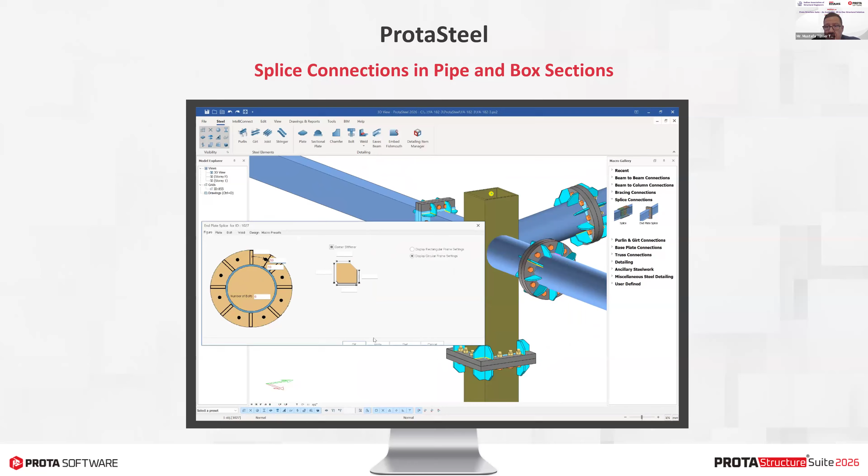Let's briefly talk about ProtaSteel. We also have new macros and new features in ProtaSteel as well. We now introduce the end plate splice macro for splice connection details for pipe and rectangular section profiles. What makes this feature powerful is the level of control it provides, just like the other macros. Within the macro properties window, you can easily adjust the number of bolts and their specific arrangements, etc.

And the fin plate macro that's used to create beam-to-beam and beam-to-column hinge connections now supports main profiles made of hollow sections, including square hollow or rectangular hollow sections.

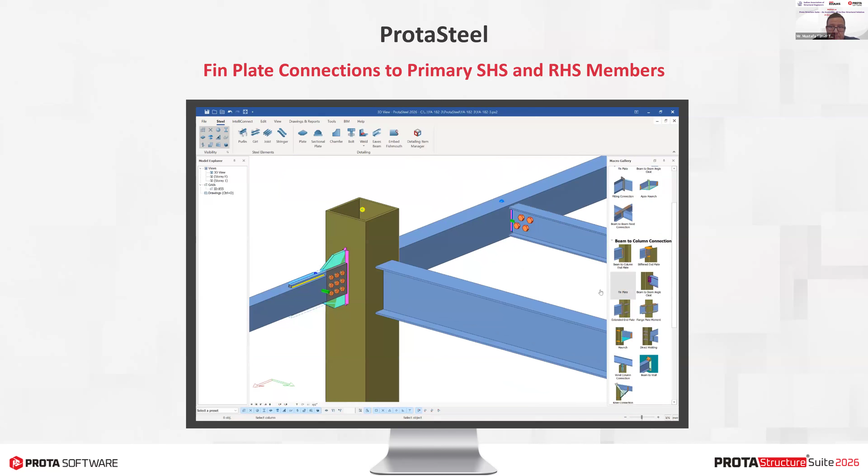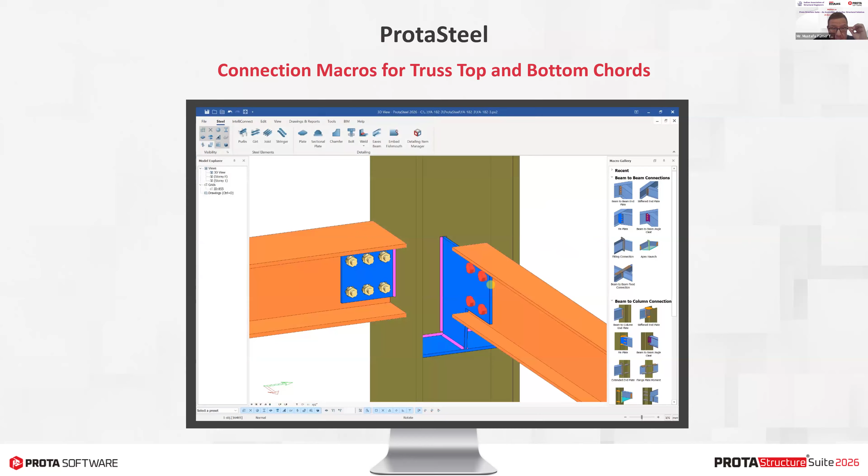In ProtaSteel 2026, truss-to-truss and truss-to-column connections are now supported by beam-to-beam and beam-to-column connections, like regular connections. In the previous versions, all the beam-to-beam and beam-to-column connections were only applicable to primary members, like primary beams or columns, and truss top chords and bottom chords were not able to be connected with these connections. But with this new version, you can now connect the truss top and bottom chords using these regular beam-to-beam and beam-to-column connections as well.

Finally, ProtaSteel comes with IFC4 support as well, and all the detailing objects and the entire model created in ProtaSteel can be exported to the IFC file.

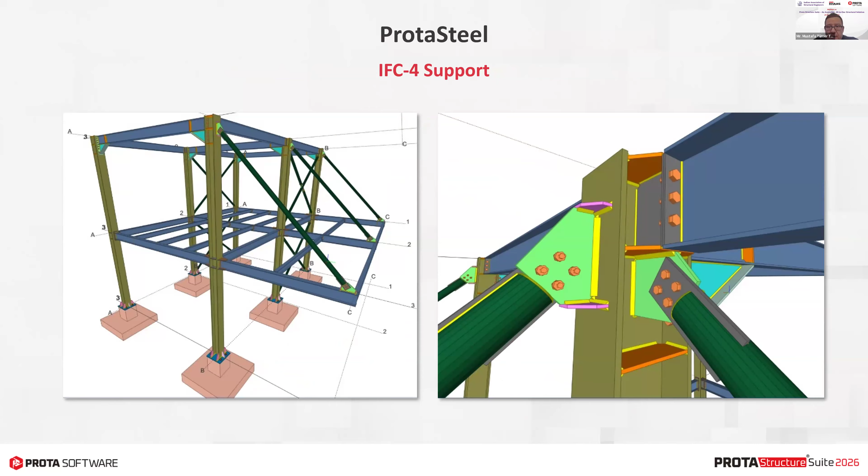Finally, I want to briefly talk about the requests and the roadmap for ProtaStructure related to Indian standards. We had requests about wind dynamic effects, clause 9, part 3, that's already done in ProtaStructure. We know now we are dealing with a new version of IS 1893 2025. This is work in progress, and we are hoping to release it for this existing version. You will not need to wait for the next major version for it.

Another pain point for you was IS 16700, especially if you are dealing with high-rise structures. We do not have direct support for it, but principally we have all the tools, and you can use the time history pushover and multi-mode pushover, and you can use the member assessment reports to at least get a hold of your structure's performance within ProtaStructure.

For the roadmap for the next version, we are working on axis independent modeling. In the next version, you will not have to use the axis anymore. Of course, you can still continue using them, but the members will not be tightly related to the axis.

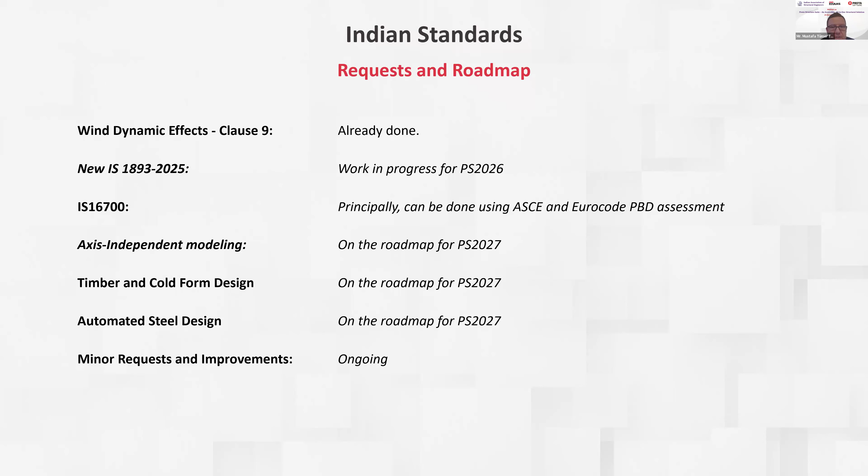Okay, thank you. This concludes my presentation today. I hope you enjoyed what you saw here. Again, ProtaStructure is packed full of features, which is impossible to talk about in a very short time. So we are creating detailed documents and presentations as best as we can to communicate this to you, and stay tuned with us for upcoming events and upcoming releases.